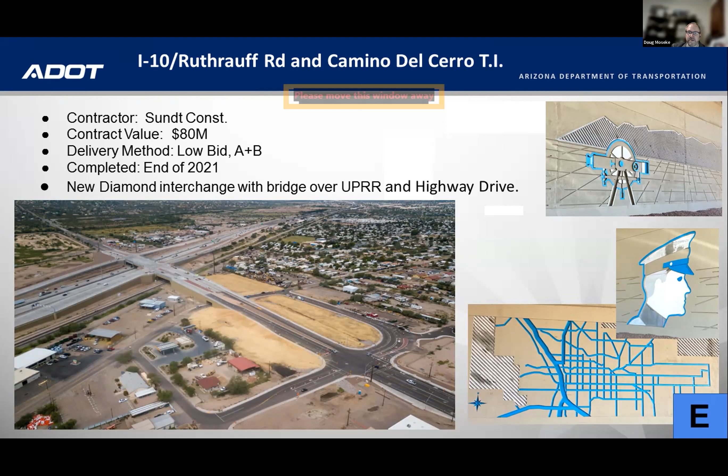This one we bid a little interestingly - we bid with a low bid with an A+B component. So the contractors actually bid the A part, which was the cost, and the B part, which was the time. There was actually a value to the time, and there were incentives for completing the project up to 45 days below the scheduled time. So that was really successful for us - it ended up completing right at the end of 2021. It's a new diamond interchange with a bridge crossing over the Union Pacific.

So the next project that wrapped up at the tail end of the year is another exciting project because it's our first diverging diamond in the South Central District. This is the Houghton Road TI on the southeast side of town. Ames Construction was the contractor, with a contract value of $23.4 million.

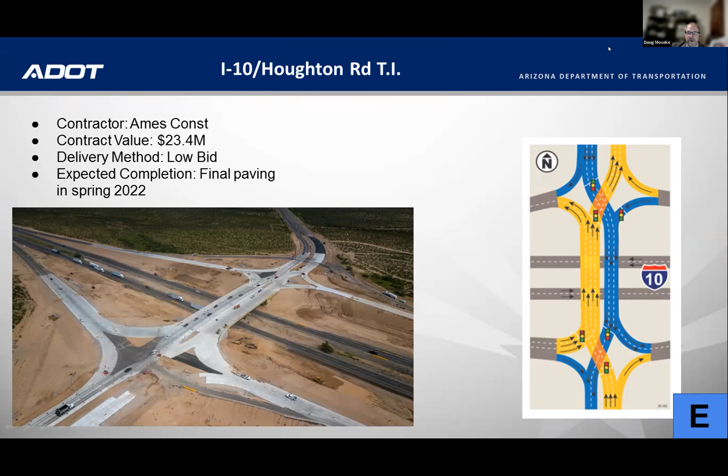The interesting part of this, as you can see on the right side of your screen, is traffic actually switches to what we would normally call the wrong side of the road as it crosses the interchange. The benefit is it provides a lot more free-flow turning movements, so when you have a lot of folks entering and exiting the interstate, you can really increase your capacity by using the diverging diamond.

So if you haven't had a chance to drive out to that side of town, that's fully up and running. Yeah, it's an interesting drive-through to experience.

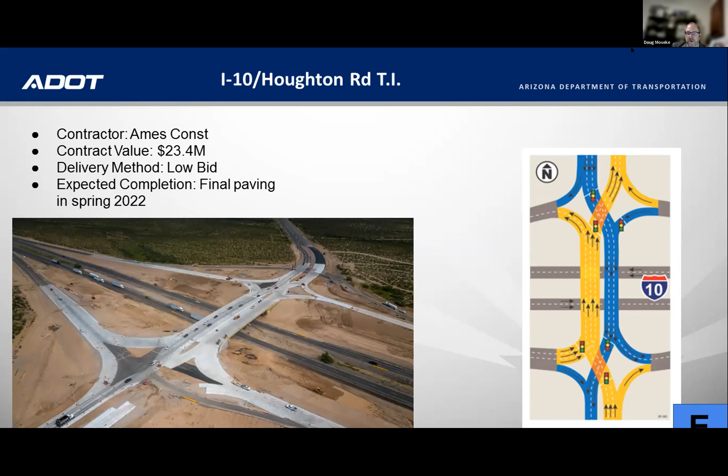The next project I wanted to talk about is the SR-77 project, which is currently ongoing. It's actually a combination of 3 projects. We have SR-77, otherwise known as Miracle Mile and Oracle. The first project was I-10, the junction of I-10 up to River Road. That was basically a pavement preservation project. It included some ADA enhancements, a few signal improvements, and a little bit of work up at the bridge. The contractor for all 3 of these projects, which were all bid as one, is Granite Construction.

It was a low bid at $34.37 million, and they're virtually finished with the junction to I-10 River component. They have a little bit of work to do right up at the Wetmore area and just south of River. Then the second component is the River to Calle Concordia portion.

That project is a little bit more involved. From River up to Ina, they're adding streetlights, and then from River all the way up to McGee, we're going to be adding curb, gutter, sidewalk. We're going to add in some drainage improvements, and then from McGee up to Calle Concordia, you've probably seen that's been paved. So that section is pretty well complete.

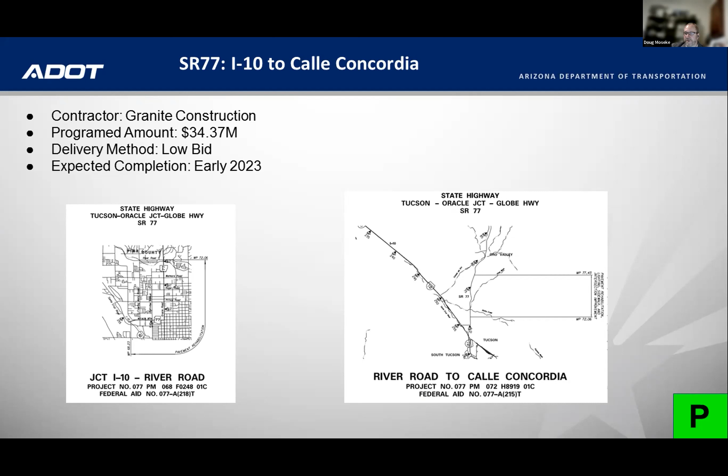The third component of this project is right at the McGee intersection at Oracle. The RTA, working with Pima County, was able to provide some funding that had been identified for a northbound to westbound turn, so turning left while heading north on Oracle onto McGee. We're going to add a dual left turn lane to help increase the turning movements through that intersection. This is ongoing and anticipated to complete in early 2023.

Excuse me real quick.

Okay, next we're going to move on to 2 of the upcoming projects, and this is where we'll spend the bulk of our time today. One of them in particular we'll spend a little more time on, but these are the I-10 pavement life extension between Ina and Tangerine Roads, and then the I-10 reconstruction and widening from Ina to Ruthrauff Roads.

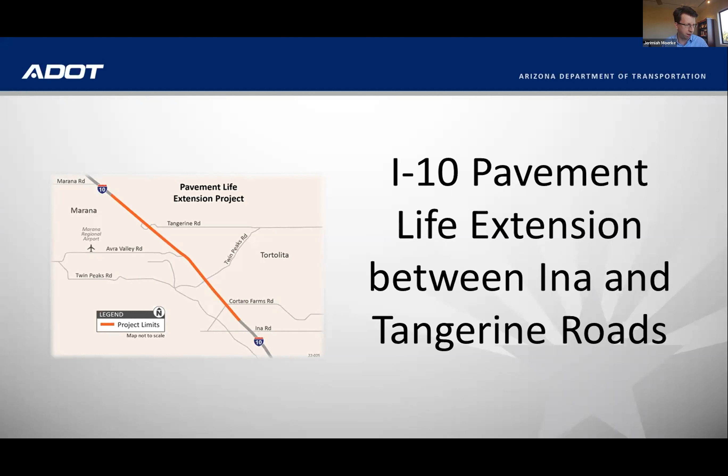First off, the pavement life extension between Ina and Tangerine Road. I hope you can see on the map here, that's the name we have within the ADOT system for the project, but the actual limits run from just north of Ina Road, where the Ina Road Interchange project ended a couple years ago, all the way up to almost Marana Road. The limits actually go a little bit past Tangerine Road.

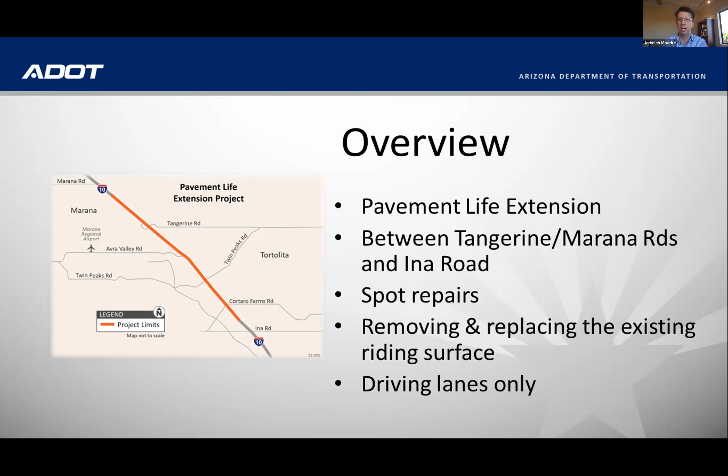So we call it the Ina to Tangerine Road project, but it actually goes a little closer to Marana Road. This is a pavement life extension project. Basically what we're doing is removing and replacing the riding surface of the road and also doing some spot repairs. Just to be clear, this isn't a full reconstruction, not a full depth mill and overlay. It's the riding surface on the driving lanes and some spot repairs in the area between Marana Road and Ina Road.

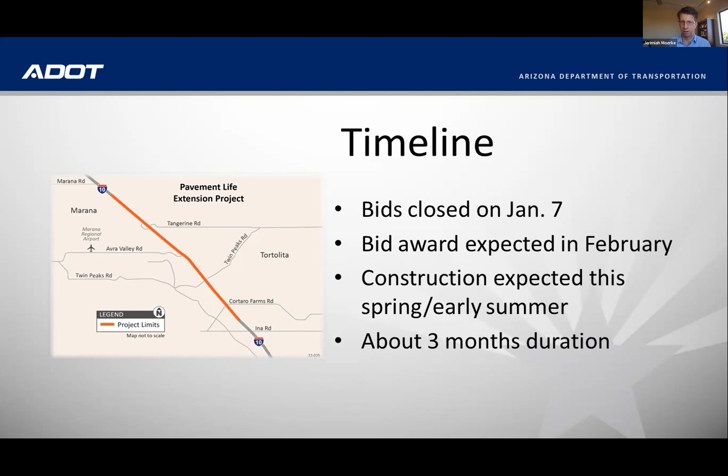For the timeline, the bids closed on January 7th. We expect it'll be awarded in February, and construction will begin later this spring or into the early summer. We expect the project to last about 3 months.

So what to expect? I know anything on I-10 sounds a little bit intimidating, but we think the impact should be minor compared to a lot of work on I-10. All work will occur overnight. Right now in the contract, the scheduled times are 9 p.m. to 5 a.m., Sunday nights to Friday mornings.

That means during the day, all 3 lanes of I-10 will be open, and all ramps will be open from 5 a.m. to 9 p.m. Overnight, there will be lane reductions.

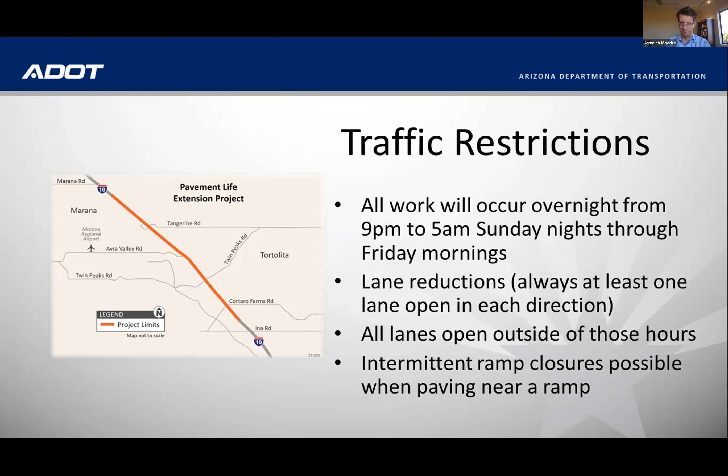I-10 will always be open with at least 1 lane in each direction, and all lanes will be open outside of those hours. One other thing to note: when they're doing paving near a ramp, they may need to close a ramp intermittently during overnight hours. We'll do our best to share information on those closures as they're planned. These are the restrictions anticipated on this project, again 9 p.m. to 5 a.m., Sunday night to Monday morning, Monday night to Tuesday morning, etc.

So now I'm going to turn it back over to Doug here for a closer look at the I-10 reconstruction and widening between Ina and Ruthrauff roads. Thanks, Jeremiah. Yeah, this is the next real big project occurring in the South Central District.

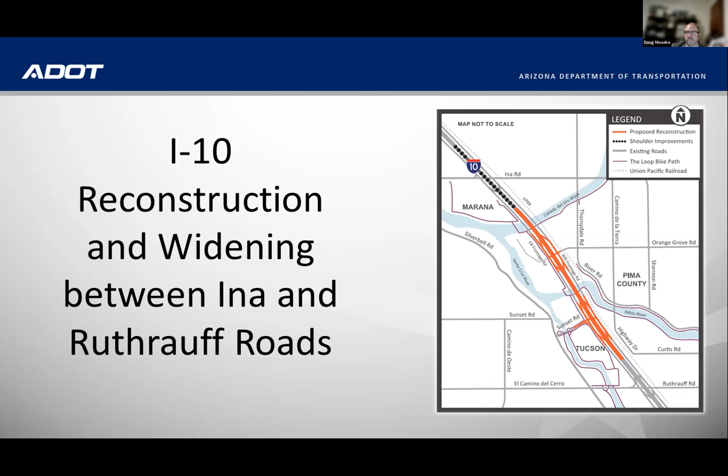We completed the traffic interchanges on either end, and starting later this fall we're going to be reconstructing I-10 and adding a 4th lane from the recently completed Ruthrauff interchange all the way up to the Ina interchange. We're not only widening but reconstructing it at the wash and the creek, adjusting the profile. If you've ever driven through there, you can see the frontage roads are a little higher than the main line, so we're going to bring all of that to uniformity.

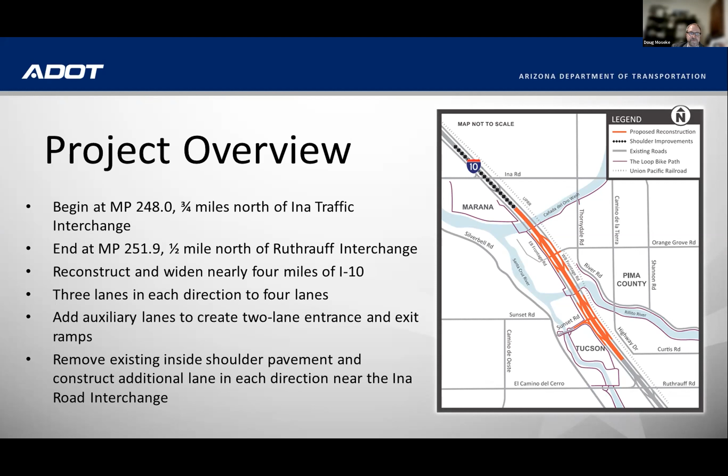It's going to go from 3 lanes to 4. We'll also add auxiliary lanes to create 2-lane entrance and exit ramps, so entering and exiting should be a lot smoother. From up at the Ina TI, you'll see the black diamonds by Ina - when that was constructed, because we didn't have 4 lanes to the south, only 3 final lanes were built at Ina. So we'll come through, remove a little pavement in the median, and put in new concrete riding surface to add that 4th lane at Ina.

We will be reconstructing the Orange Grove interchange. It's still going to function very similarly - we're adjusting the main line alignment a little bit. Orange Grove will still pass underneath just like it does today. Primarily what we're doing is enhancing the bridge crossings to provide adequate vertical clearance.

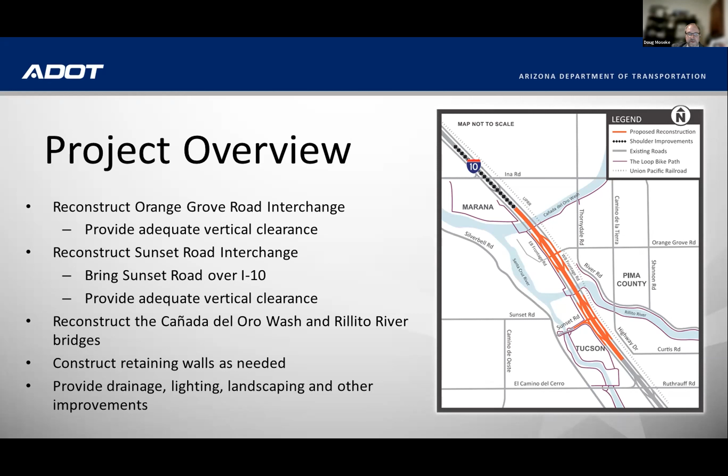Sunset Road we are actually going to completely reconstruct, similar to what was done at Ina and Ruthrauff. We're going to bring Sunset Road over I-10, providing adequate clearance there. Pima County is working on a project east of Sunset, which I'll touch on in a minute. As mentioned, we're going to reconstruct the wash and river crossings for vertical clearance as well - that has more to do with capacity of the channels. And then just standard drainage, lighting, and some landscaping improvements.

Now the project schedule - this has been a fairly quick schedule. Funding for construction is all identified to occur at the end of fiscal year 22. Design started back in December of 20. We're working on getting the project clearances - right-of-way clearance, environmental clearance - so that everything is properly cleared. Then we intend to advertise the project sometime in June, and construction would start in fall of 22. That whole reach of I-10 would then be fully completed and open to traffic in early 2025.

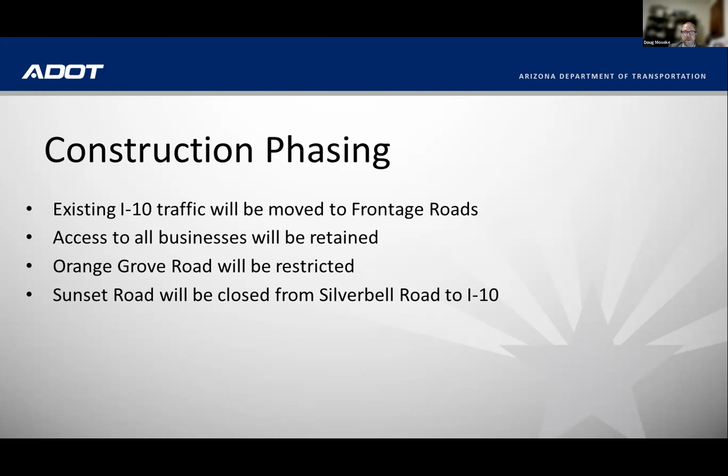To do this, we have to work through construction phasing. We need to maintain access along Interstate 10 - we know how crucial it is to the community, not only to drive through but to enter and exit on I-10. The intention will be similar to what you've seen on other improvements: we're going to move the existing I-10 traffic to the frontage roads. We'll make sure we maintain access to all businesses during this period of time. Orange Grove will be restricted, and I'll go into that further. Sunset Road, though, will be closed just because of the magnitude of work that needs to occur.

During phase A, right now there are three lanes of traffic on mainline I-10 in each direction. That will be maintained on the frontage road, so you'll still have 3 lanes, but the speeds will be reduced. The ability to move through there will still function very similar to what mainline covers right now.

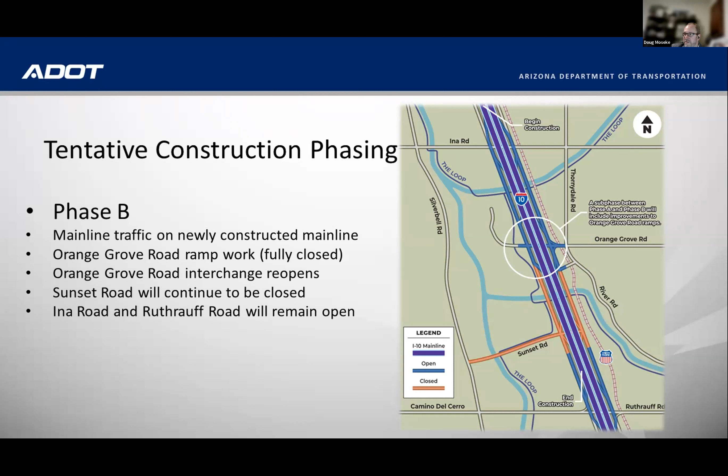One of the other concerns, and Jeremiah, maybe if you can go back to the other one just for a second, you can see the loop identified. The Chuck Huckelberry loop crosses I-10 at two locations, both the CDO and the Rillito. So we understand how important the loop trail is to the community.

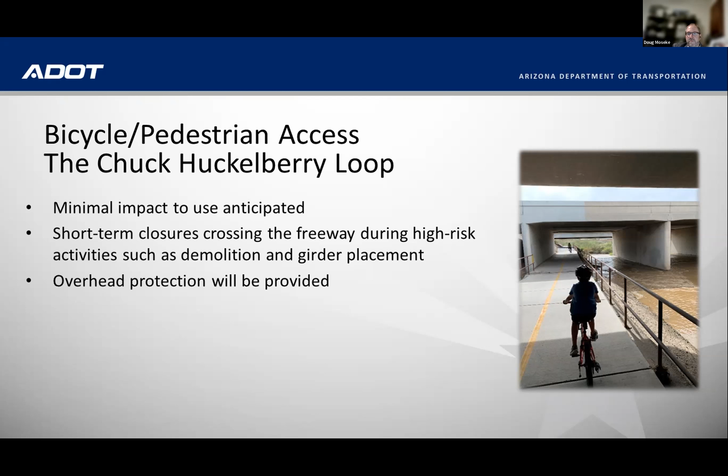Jeremiah, if you want to slip to the next one, we're really trying to minimize impact to the Chuck Huckelberry loop. We're going to have short-term closures crossing the freeway for some of the high-risk activities. We don't want to put anyone at risk when we're doing the demolition of the bridges or swinging the girders over to place them. But otherwise, our intention is to provide overhead protection, so both of those sections can be utilized. We also intend to always have one or the other open. We do not intend to close both at the same time.

Jeremiah, you want to hit a couple of the project features? Sure. So these snapshots or renderings you're looking at are part of a video or animation available on our project website that runs through the whole project area, showing what I-10 will essentially look like between Ruthrauff and Ina when the project is complete. But we pulled a couple snapshots to show you in this presentation.

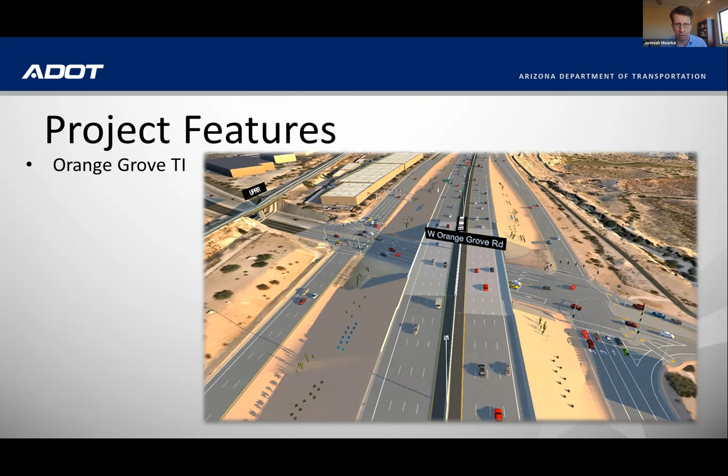This is the rendering of the new Orange Grove TI, looking to the southeast. You can see the railroad and the underpass on the left. As Doug mentioned, one of the changes occurring at Orange Grove is that the mainline I-10 alignment will be shifted slightly to the west. So you can see here the 4 through lanes in each direction on I-10, Orange Grove still going under I-10, and the underpass not changing much under the railroad there.

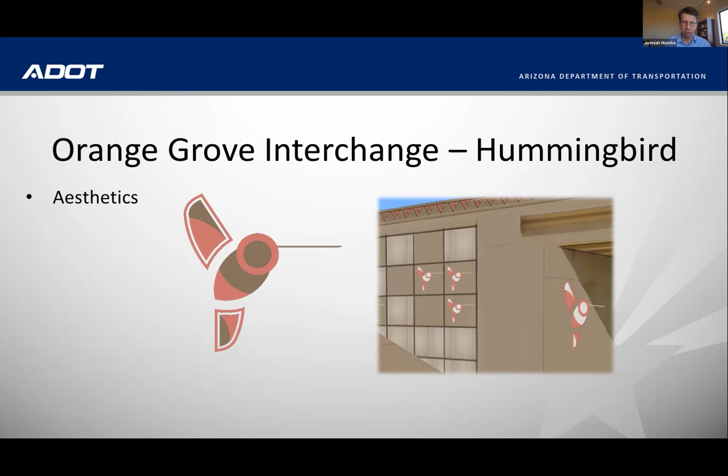And then at Orange Grove, one of the aesthetic treatments, or artwork, that is in development right now is a hummingbird concept. So this is kind of a rendering of that concept that is intended for Orange Grove.

I wanted to also highlight Sunset Road. This is looking in the exact opposite direction of Orange Grove, so looking to the northwest. The Santa Cruz River and the Big Pit is on the left side of the screen, and the UPRR is on the right. You can barely see the railroad there, but you can kind of see the Rillito maybe in the background as well. The main point here is that you'll see Sunset Road has essentially been flipped, similar to Ruthrauff and Ina.

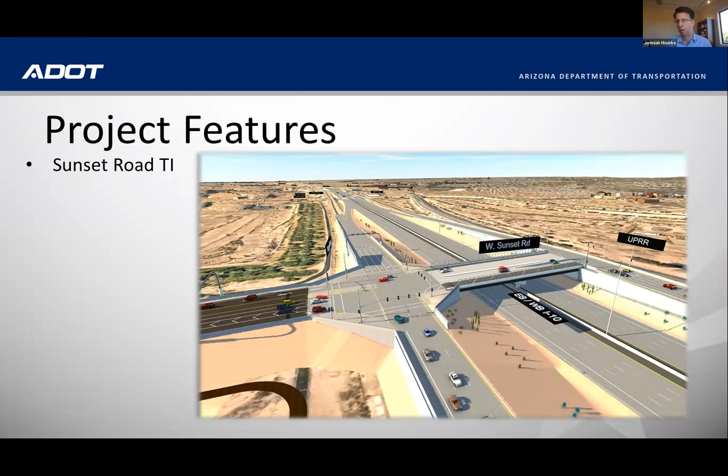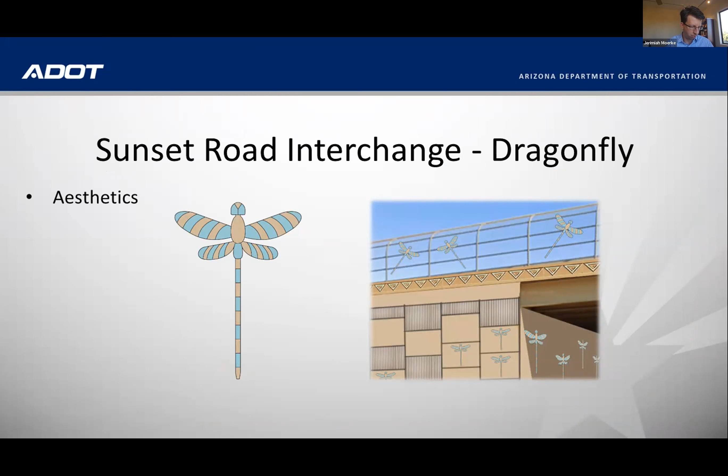Anything else I want to point out here? I don't think so. The alignments are pretty much the same, but just to note that with this project that ADOT is constructing, we are constructing up to the UPRR, and I'll explain a little bit more on that in a second. The aesthetic at Sunset is a Dragonfly, so that is the treatment we are anticipating at Sunset Road.

As I mentioned before, and Doug mentioned this too, there is a separate county project. The county is working on a project to extend Sunset Road over the UPRR and over the Rillito to connect with River Road. We are coordinating with the county on that project, but as of right now, that is a separate project. I wanted to share the contact information of Carol Brickta with the county if you have questions about it, because that is not part of the ADOT project in the area, although we are coordinating to make sure they'll match up nicely when they're all completed.

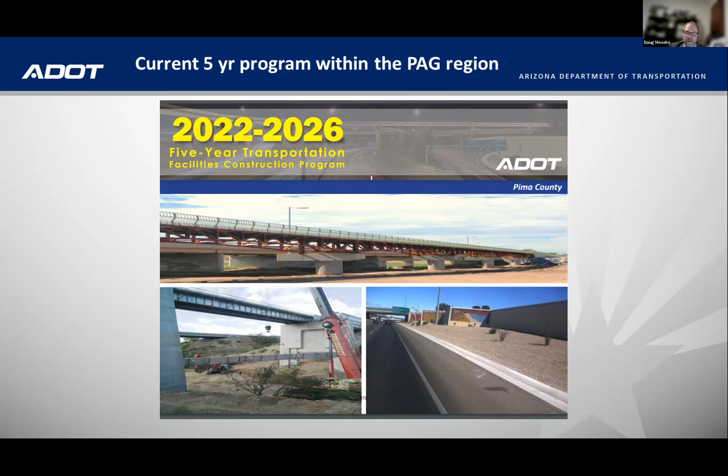Each year, the state updates our 5-year construction program. Right now we're operating under the 2022 to 2026 program. One of the big items identified as part of the statewide direction is a focus on pavement preservation.

The 5-year construction program is broken down into 3 areas. You can see in the middle of the screen a green P and a blue E: P for pavement preservation, E for expansion, and M for modernization. The direction statewide after 2025 is to focus primarily on preservation of the system, so the number of expansion and modernization projects statewide is minimal. They're really only occurring in the MAG and PAG regions because those are the two regions that have additional funding sources.

The rest of the state is really focused on pavement preservation. So what we did is try to do a real quick table of the areas within the PAG region and what those projects are, starting with the interstate. You're looking at I-10 right now, which on the left side shows what year is identified for right-of-way acquisition, design, and construction. On the right side it shows what dollars are in there, and in the middle is a description of the project.

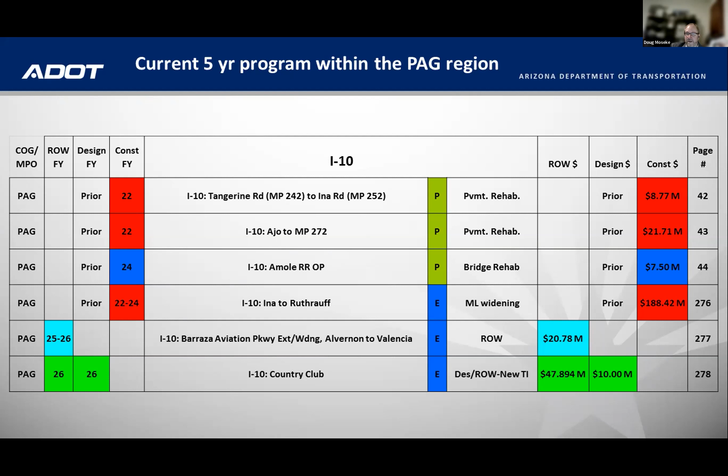We then have a bridge rehabilitation. The I-10 Ina to Ruthrauff project is the big widening project I discussed. I-10 Barraza Aviation and I-10 Country Club are part of a design concept report recently completed between I-19 and Kolb, where 18 different projects were identified to expand, improve, and modernize that reach of I-10. These are the first two projects starting to make it into the system. You can see they're in the out years, 25 and 26, with minimal dollars for design and right-of-way acquisition.

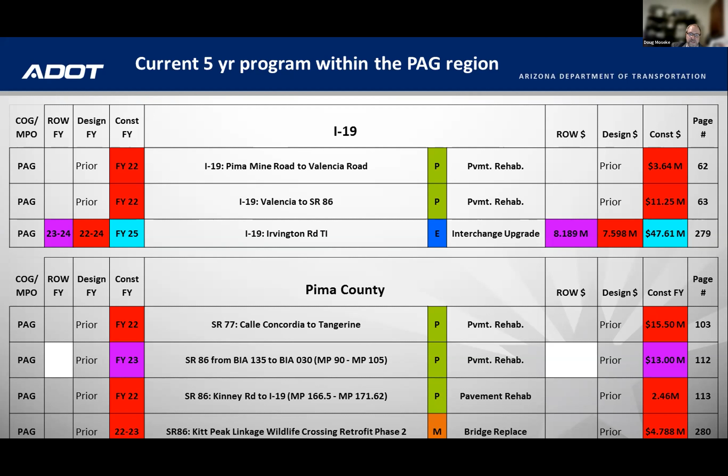Within Pima County out to the southwest, we're also doing pavement rehabilitation on State Route 86 through the Tohono O'odham Nation, as well as 86 as it comes through the city of Tucson and ties into I-19. There's also a program that was part of the RTA for wildlife linkages on State Route 86. They did some undercrossings a couple years back, and now we're starting final design on two wildlife crossings on State Route 86 near Kitt Peak. Those will actually be over State Route 86, similar to the crossing on 77 up in the town of Oro Valley.

So that's a real quick breakdown of what we have coming in the current 5-year plan for the PAG region. Are there any questions you may have on what's pending?

This is Jermaine from 1701. I don't know if it's a question, but it's more like a compliment, because we're definitely seeing growth. Being a Tucsonian, will there ever be a time where there's no construction going on the freeways? It's good, but with the traffic going back and forth, I hope the community understands it's a compliment because we have growth coming into the area.

That's a good point. It does always seem like as soon as one project is done, another is starting. I wish we had the funding to rip the Band-Aid off all at once. This section of I-10 is typically modeled through 2025, so the improvements for this reach will give you 4 lanes from downtown all the way up to Ina. That section, based on traffic modeling, should be in pretty good shape through into the 2040s.

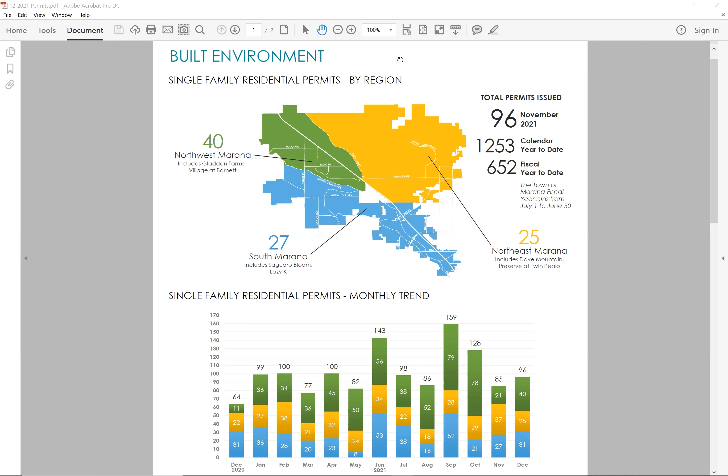When you get up into the Tangerine area, the Gladden Farms - I've spoken about this before, that Crown West, the master developer of Gladden Farms, ran out of lots. So they purchased 300 acres from Macerich, had planned on doing some retail pre-Great Recession and perhaps an auto mall and those type of things. Those plans and models have now gone away. Crown West purchased those 300 acres, and along their shirt tails came along 2 developers that took down 2/3 of that land for developments.

A developer by the name of VanTrust, which does a lot of the Amazon facilities, will be building a 1.4 million square foot distribution logistics center on that property.